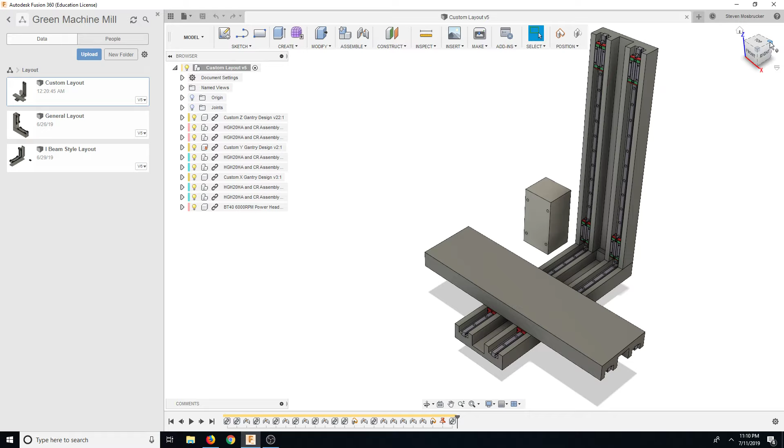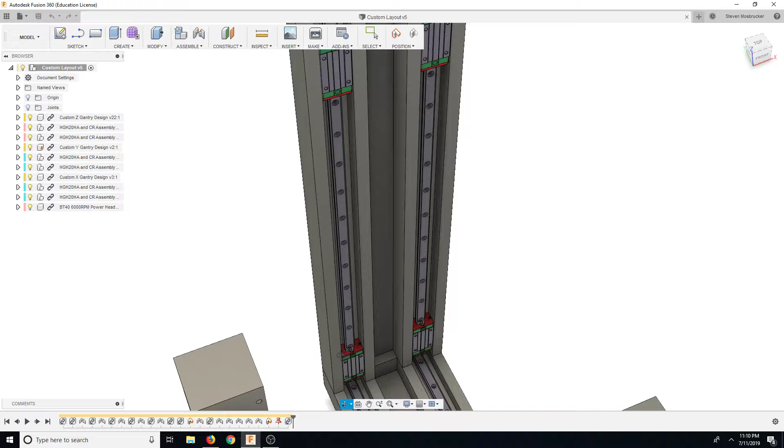Still need to contact these guys about getting the 3D model for this guy, so I could better represent it. But overall, we are looking pretty good. Again, we're at about 400 pounds. That's a weird artifact. And everything is fitting together rather nicely. Obviously, some of the stuff needs to be opened up, but that is okay.

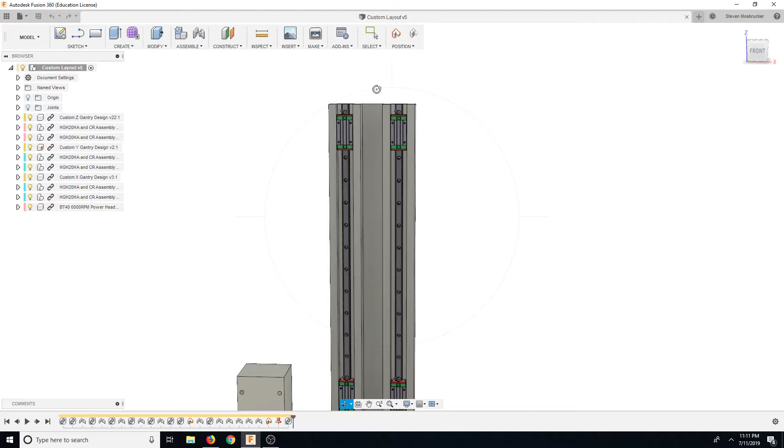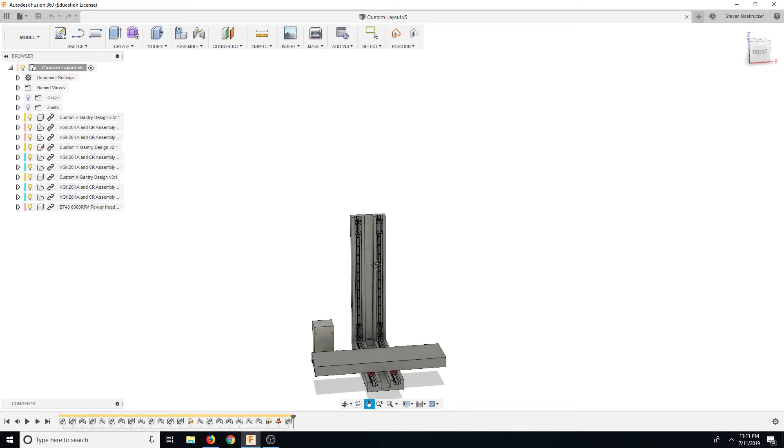So another thing is that up here, we're going to have a motor mount that allows us to stick our motor there and have a coupling. It'll probably be raised a little bit up and bolted down, and then we'll have our coupling going inside of this block to protect it, and it's probably going to be a flex coupling, and then it will block all the chips from getting up in there because it's inside the coupling. Same deal here and here. Obviously here it's going to be sticking out.

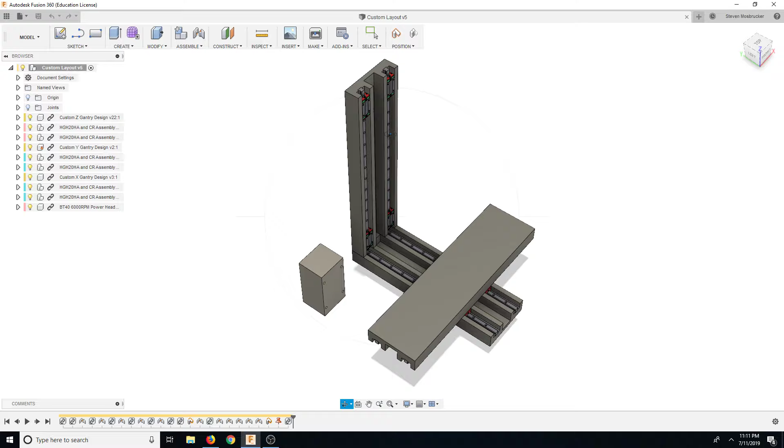What I want to do on this one, because I have less clearance here and I don't want anybody to bump into it, I'm probably going to put some feet on the bottom, and the motor will actually be down here, and then it will be pulleyed. I'm thinking something similar here, but I don't really have the room. So I might even put the motor over here on this side, because this is going to press against the back wall, and I want it to be pulleyed. Same deal with this one,

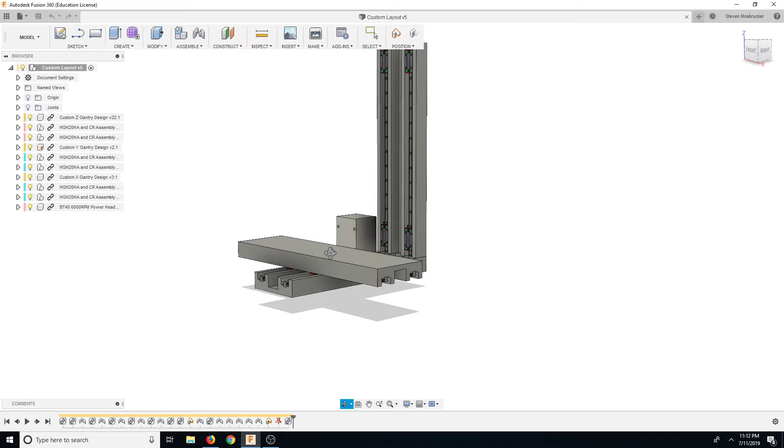but obviously here I do not have the clearance, because originally I was going to have the motor sitting down here and have it go underneath, but then I'm going to lose a lot of clearance, and the higher up this guy is, the more of a moment we're going to get for this rotation here. So I might put the motor back over here somewhere. And again, this is how tall? This is 2.5 inches tall. So let's see here.

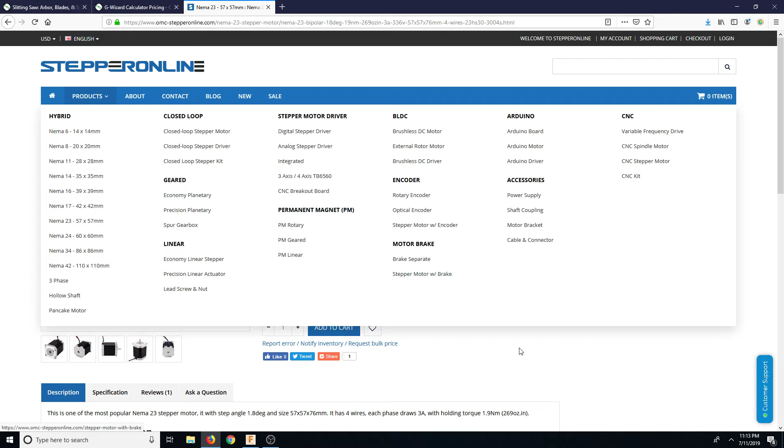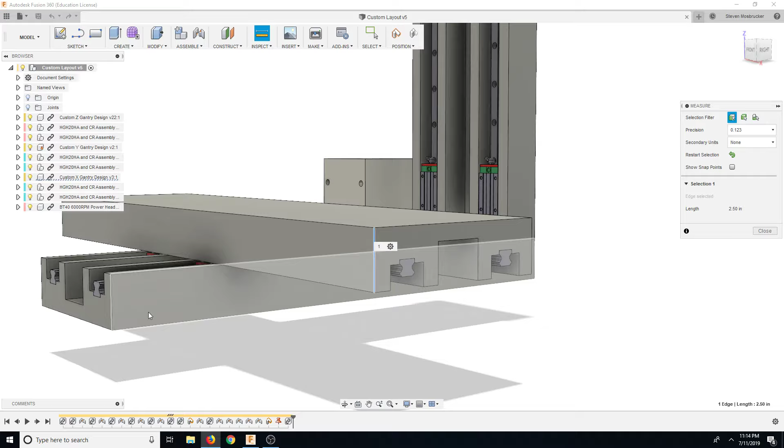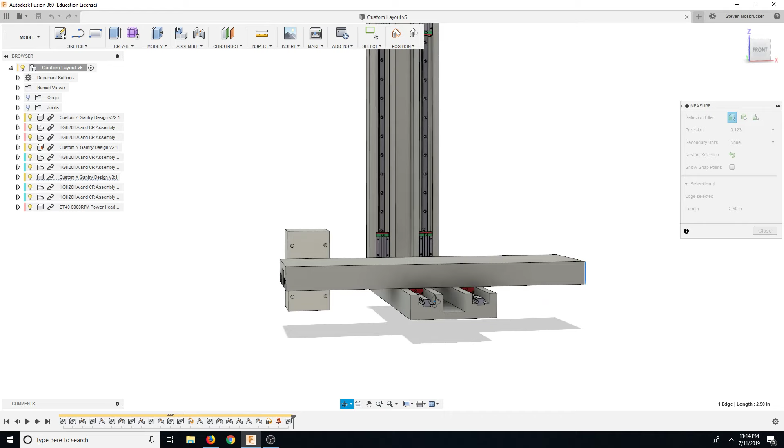2.25, so that'll just fit on the side here and not worry about any sort of clearance. But obviously what that means is that we're gonna hit here. So how are we gonna do that? Obviously you can't fit down here because it's gonna hit, and it's going to hit over here, and we're going to lose here. Put it on top, but then this top piece is going to have to be 2.5 inches tall.

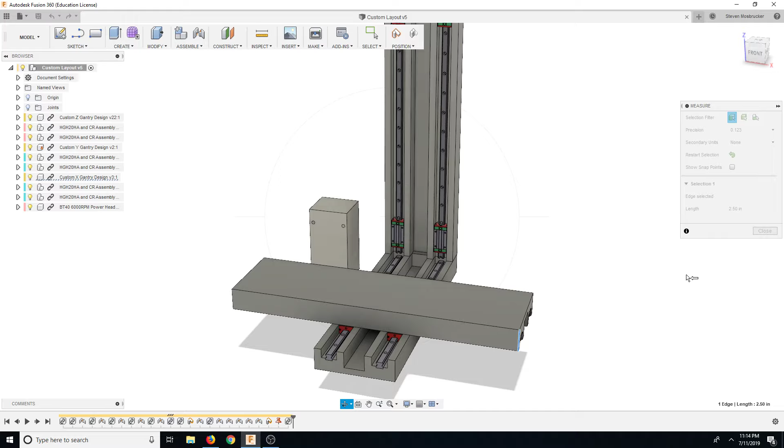But one of the things is we can put it up here on the front. It's going to stick out an additional 2.3 inches, which is not very far. And we're not going to have any issues with clearance. And it's not going to hit here because it's on this side. The front is really what I'm not too worried about. And then same deal here, put the motor down here. And then we should get the best of that.

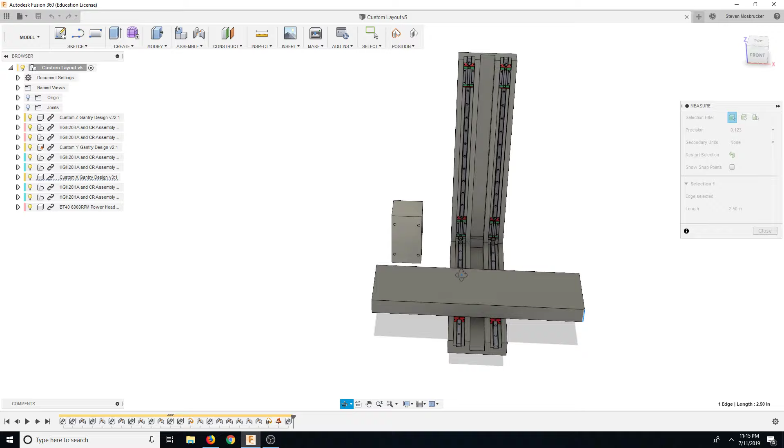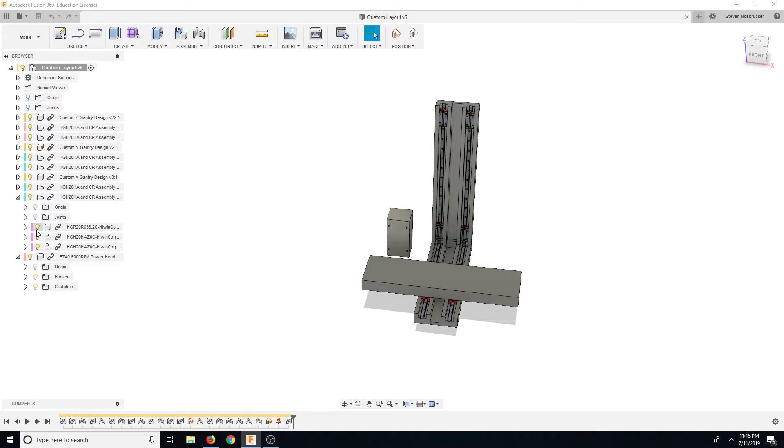I mean, there's not really any other place. Obviously that's extremely strange to put it there, and then we'll have to put something on top of it. But other than that, I think that'll work. Okay, so now, again with the math. I remember our math was wrong here before. So let's go ahead and fix that. Yeah, and we could see them in there.

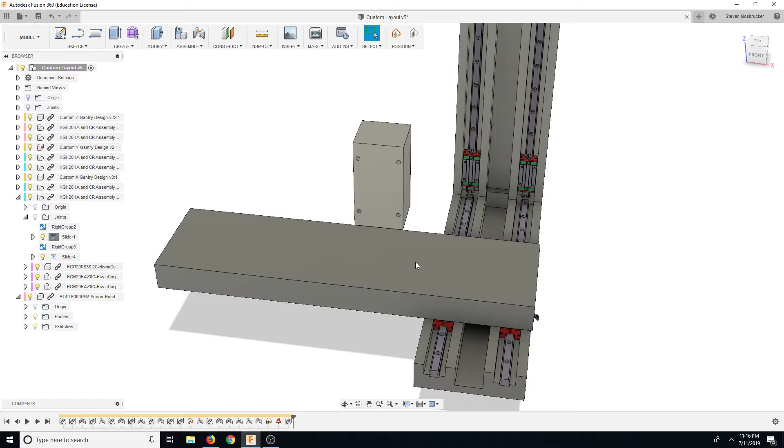Oh, and then I have my little notebook. That's why I wrote it down. So this is negative 22.75. You see the little nub there. Obviously, there's going to be another nub there. So if you want to do this, you move it all the way back, and then you could get the thing underneath it there. And then these are stationary, so they're always going to be going back and forth with this. Is that almost flush? Oh no, it's sticking.

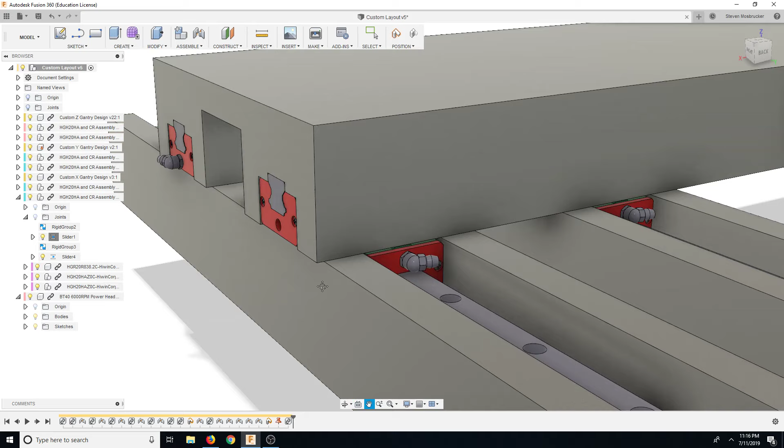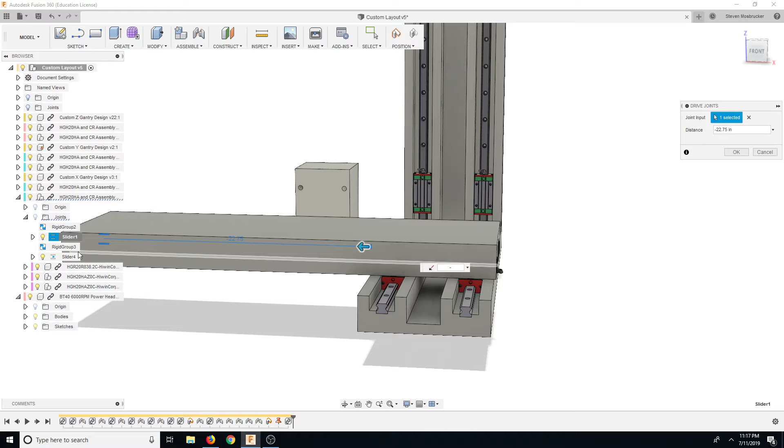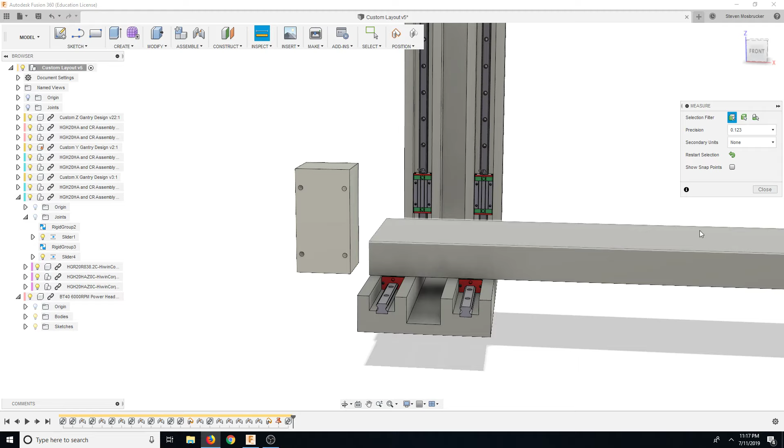Sticking over just barely. So we're losing a little bit there, but we could probably get this guy to come off a little bit more to where this is flush. But anyways, let's go the other way. Drive joint. So let's say that this is... oh no, positive 1. Why did I write negative 2 there? Plus 1. Okay, so now, again, let's open up the Trello here. So now if we go from here to here, we're talking 23.896.

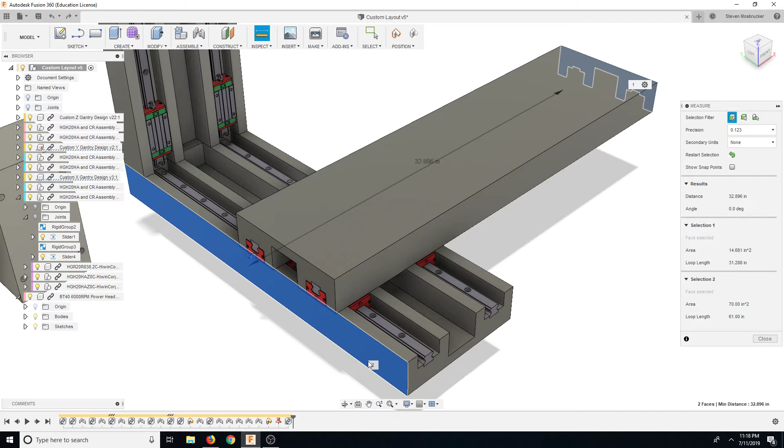Wait, where did I do that from? I just have to stay consistent on where I do it off of. Oops. .24 inches. So this is 23.

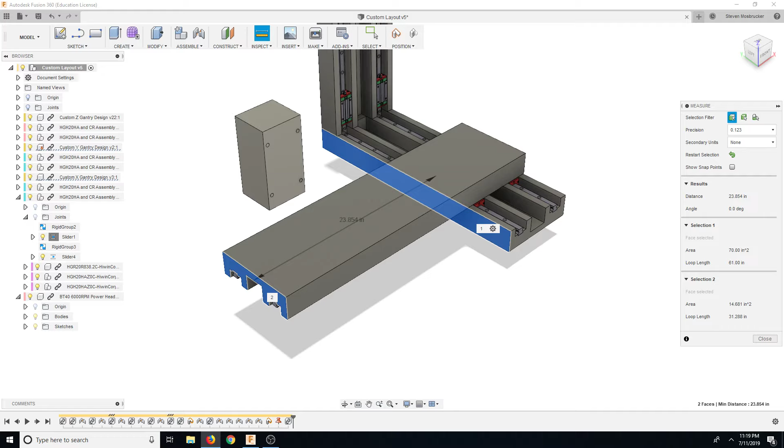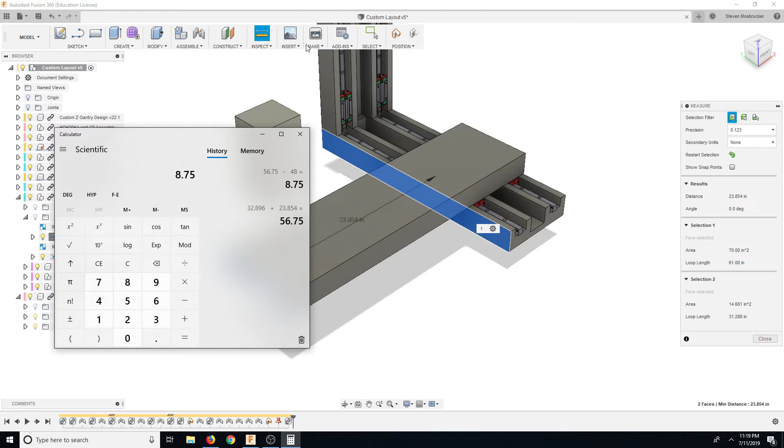So total is 32.896 plus 23.854. That's 56 inches. Total that we have is supposed to be 48. So let's cut off 8.75 inches.

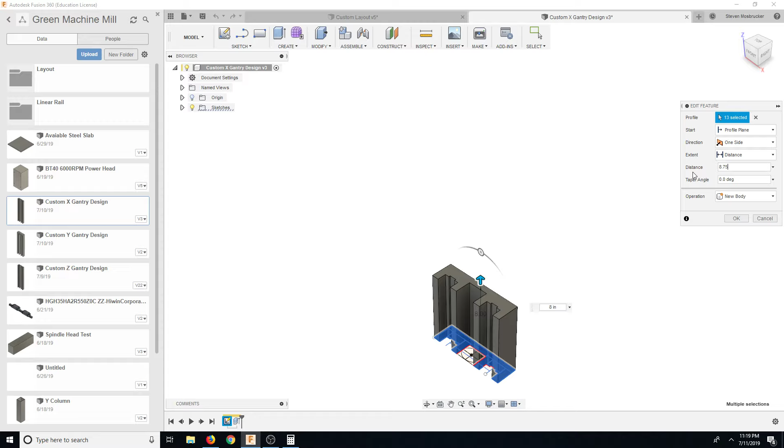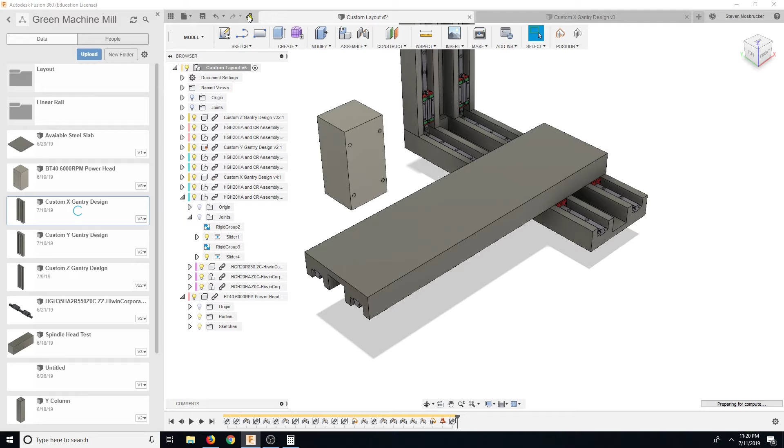Oops. So basically what it looks like is that we're getting rid of the center portion. So now it's going to stick out quite a bit, and we're losing 9 inches there. Okay, so custom X gantry, bodies, oops.

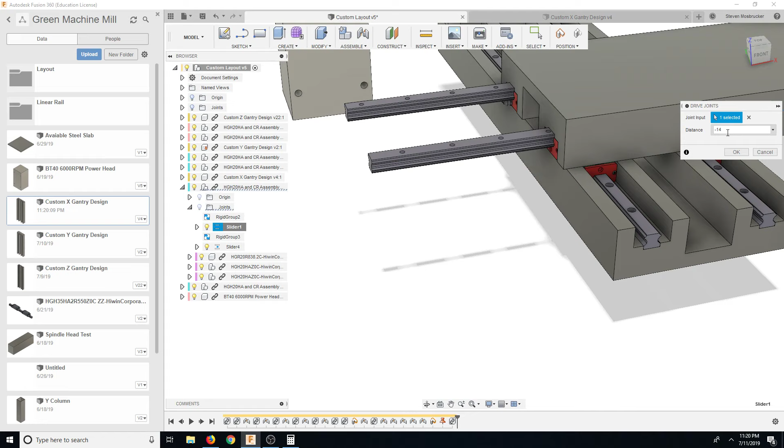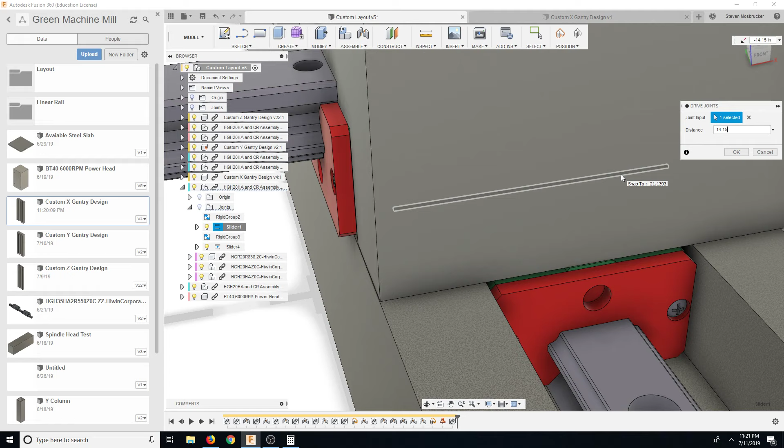Okay, so the new one is +1. Let's say like -11. Okay. So say new one's -14.15. So that's 15.15 inches, right, for travel total. Okay, so now let's see if we could clear that.

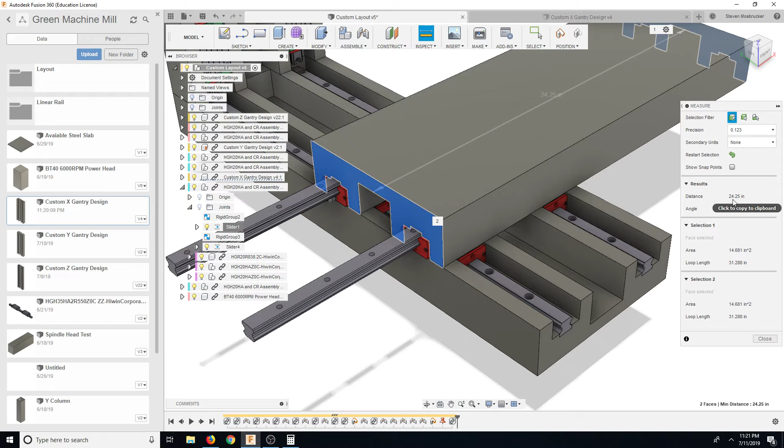This distance is 24 inches. No, 24.25. And that's at that distance. And let's drive it to +1. And this is 15. Looks like we are short.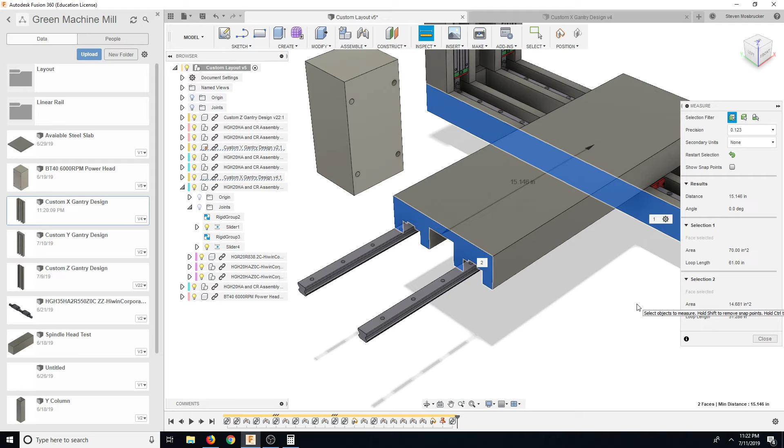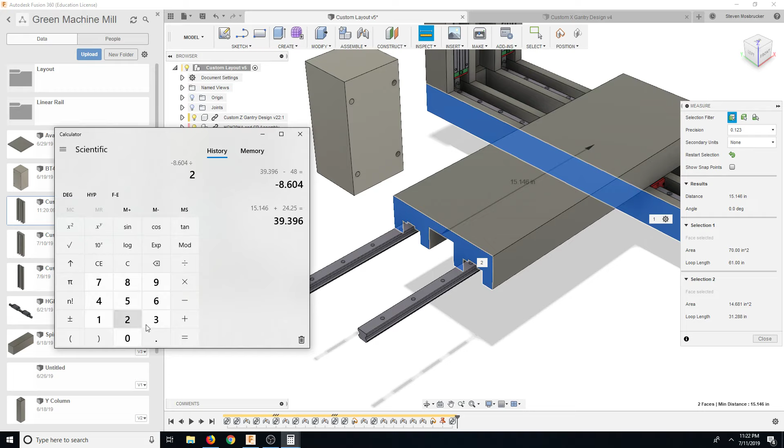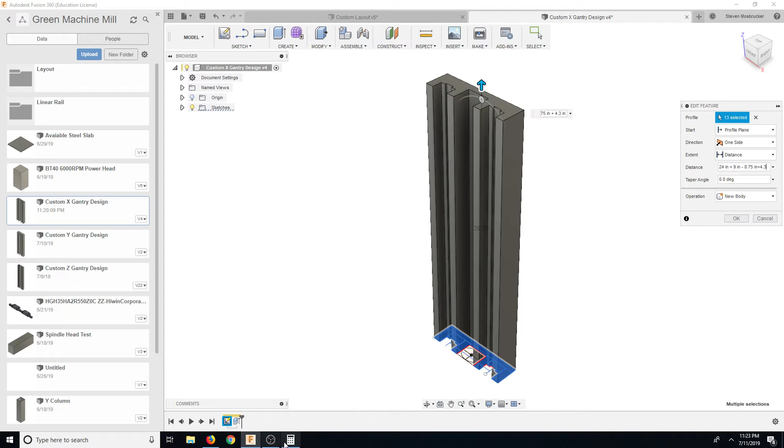And then this divided by 2 equals 4.3. So now if we go back and we change this to add 4.3, because we're moving it twice, plus 4.3 something. 4.302. Okay, so now let's go ahead and save this. Let's go ahead and update this. So now we should actually get almost exactly what Tormach's got.

So now we're going to keep the same 1, and we're going to delete this again. And let's go ahead and drive the slider, and then let's go negative. The last one was -14. Let's say like -16, -18, -19, 18.5. That's okay. Probably 18.45. -18.45 to 1, so now we have 19.45. It's almost exactly like the Tormach.

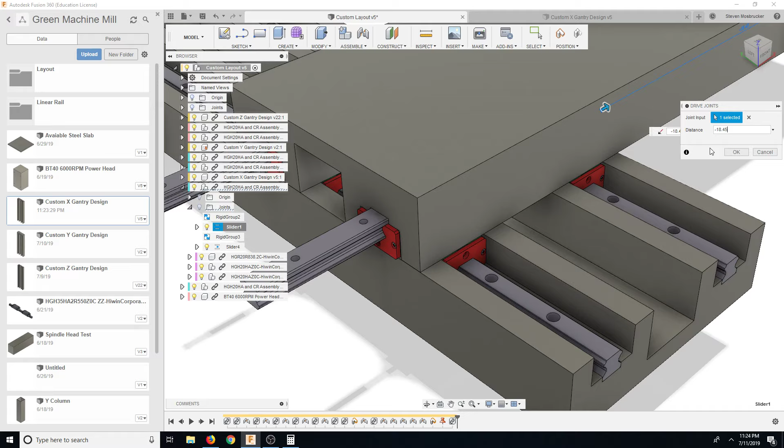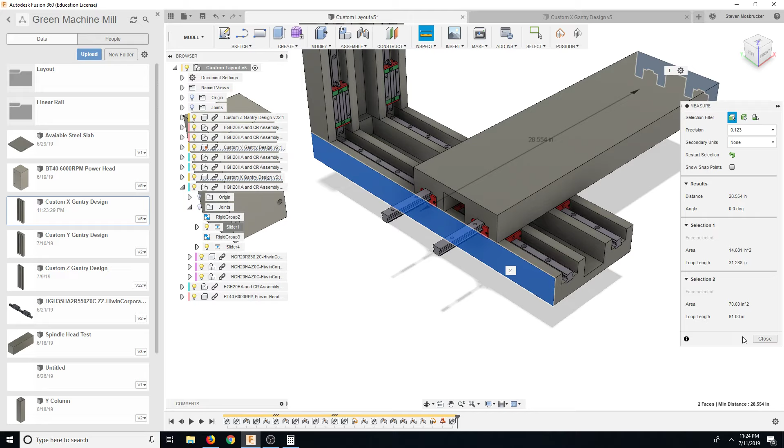Okay, so now let's look here. Basically what I'm going to do is go from here to here. It's 28.554. Let's drive the joint, and let's go to +1. That's 19.448. Now I can tell you we are really close. 28.554 plus 19.448. It's 48 and 2 thou.

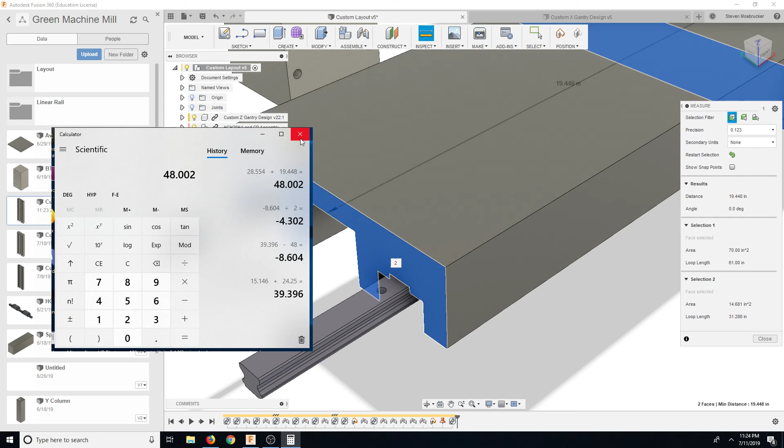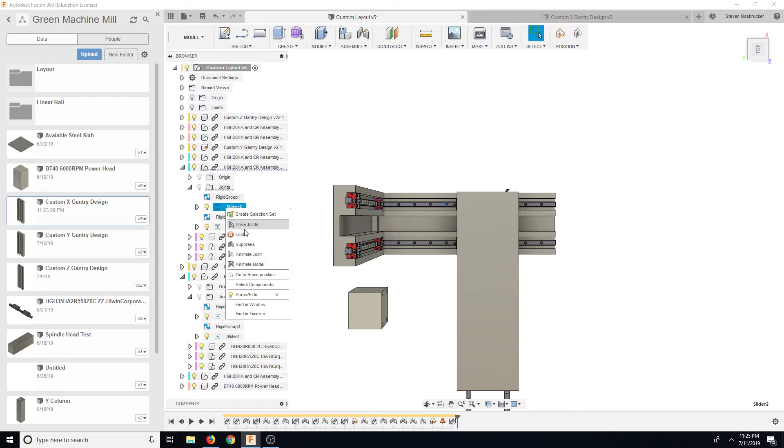Alright, so that is a total of 19.45 inches. 19.5 inches. That's another inch and a half over what the Tormach requires. And let's go ahead and see the total travel of the head here, of this other axis here. So let's go here and pick one of the joints. Drive joint. Let's see.

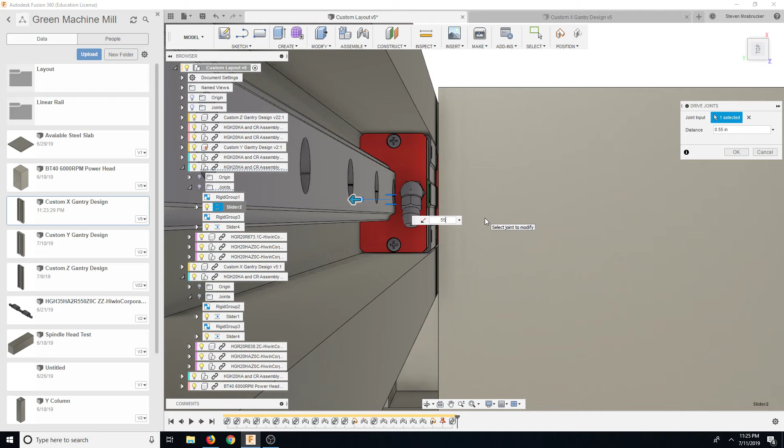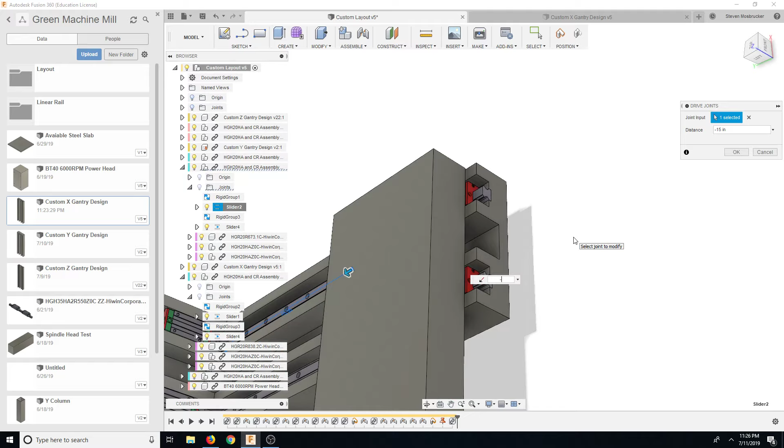Let's pretend that this is on the inside. Oops. 0.75. I mean, this is obviously to a big extent here. Okay, so now let's say here, so the y-axis is about from 0.6 to... and of course we could go over the table, but we don't want this to go past, which it looks like it's pretty much there. It's 0.6, negative 15.75. So total is about 16.35 inches. So 16.35 inches on the,

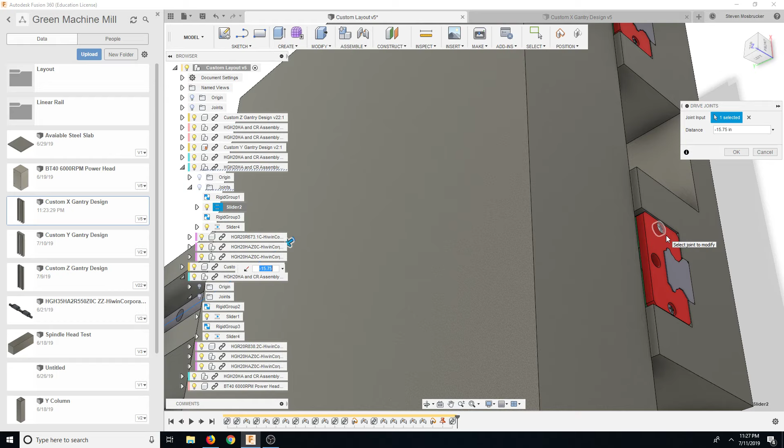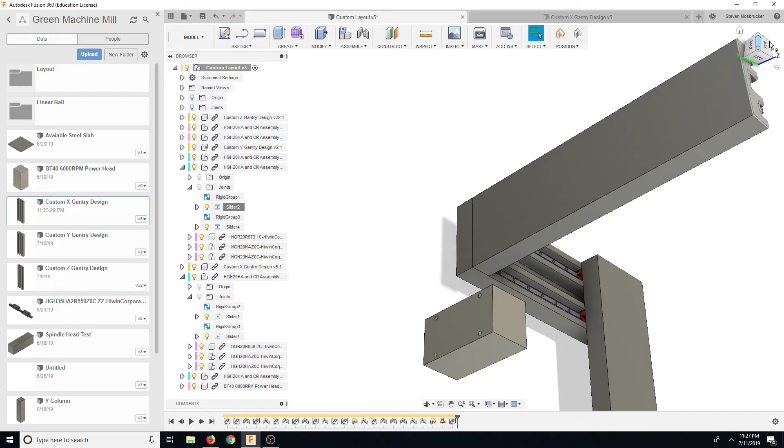so let's look at total travel. And obviously we're losing some here because they're basically two combined. So this should be 28 inches, right? This should be 29 inches from here to here. Oh, it's 28. So this is actually supposed to be longer. But we have the pulley there for clearance, so 28, 29, whatever. We could probably add another ½ inch and have a pulley stick out ½ inch, but that sticks here and we save with the motor.

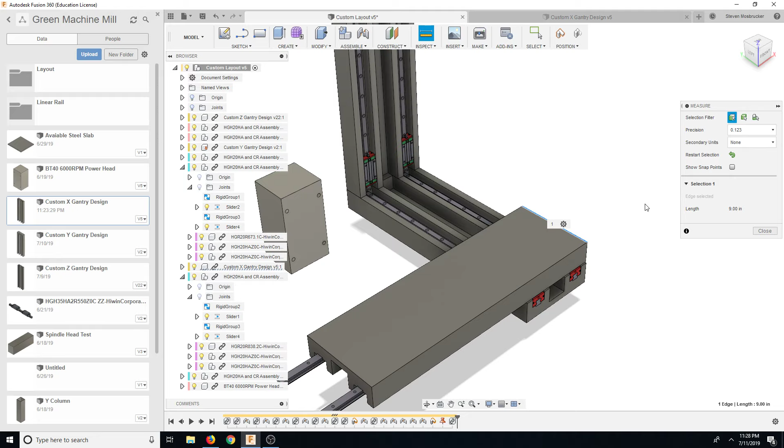But anyways, total travel in X is 19.45, and Y is 16.35. Now that's the total travel, but in this case our bed is only 9 inches, right? It should be 14 inches. So what that means is that we're going to lose a lot of travel, right? So here the travel's not balanced. So let's see here, custom X gantry. So this is actually supposed to be larger. Let's see if this breaks everything, which it does.

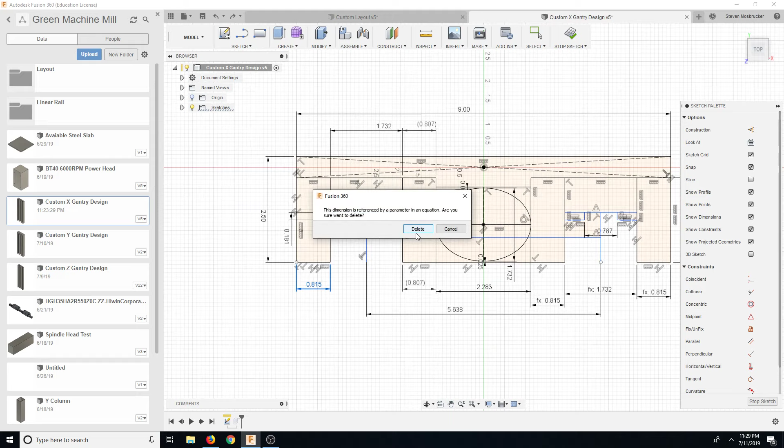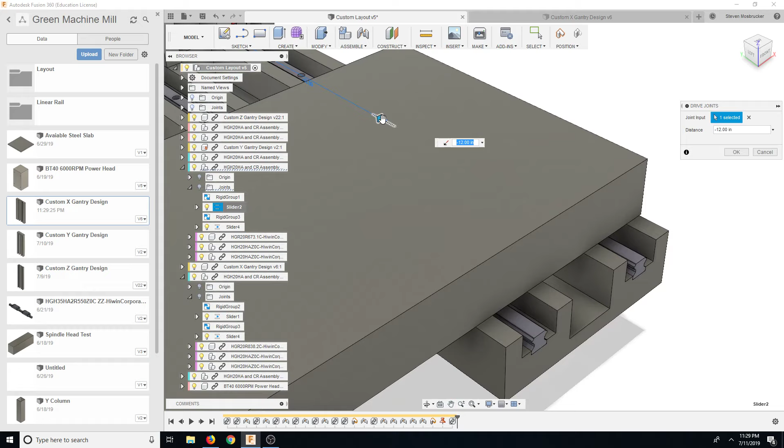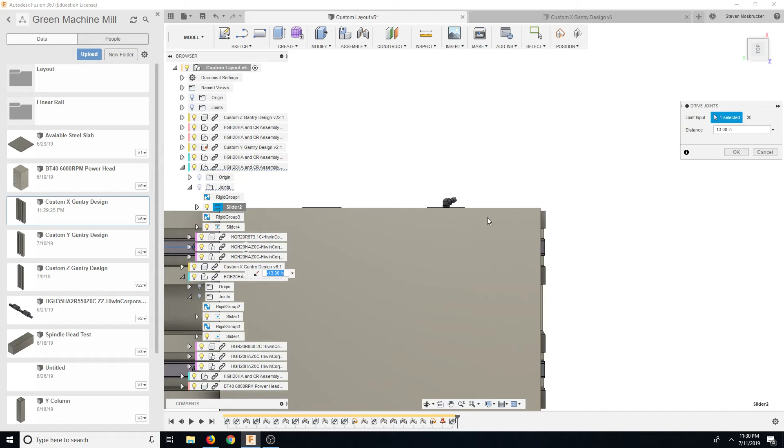I mean, that's basically it. Obviously, we'd have these separated, but you get the idea. Let's see if it breaks everything. Nope. Okay, so let's go back here. Obviously, this is incorrect, so slider here, drive joint. So this is going to be super unstable. Because that means that our part can only be 9 inches, which is not quite what we would like it to be. Because we want our table to be just as big as what we could load onto it. We don't want it any bigger, we don't want it any smaller.

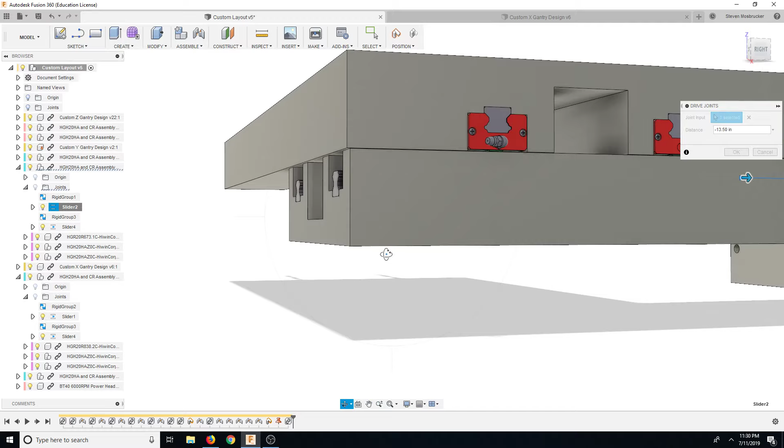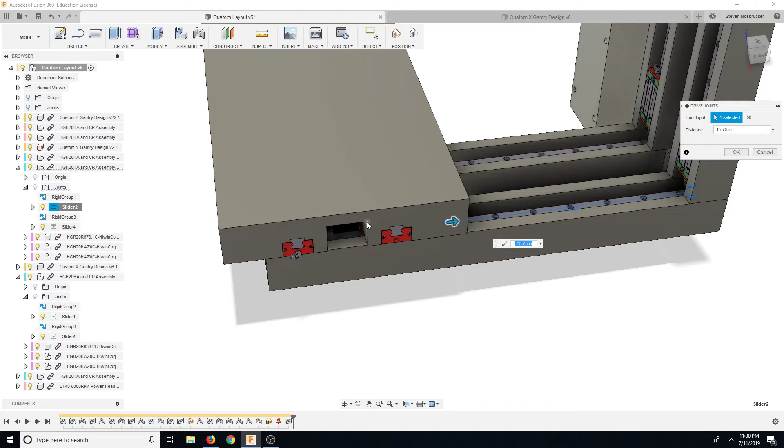Okay, so let's say that. So now we're at 13.50, because 16 was way too much. I should have known that, because that's almost square. That's not right. And then obviously, this is going to be so stable. But here's the issue: I have to make something that big.

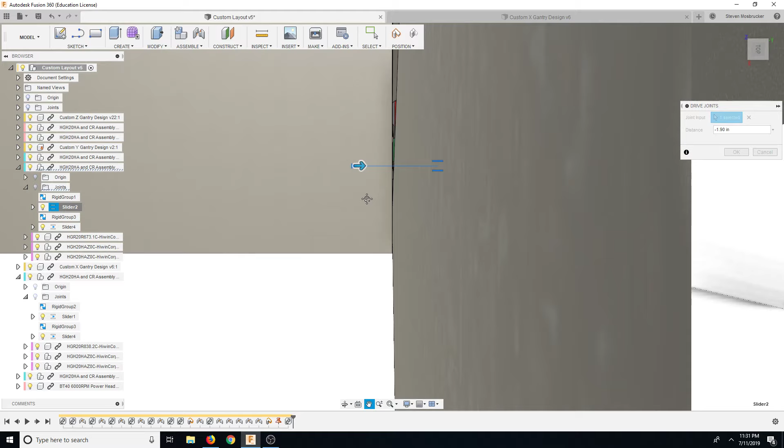I'll see that that's good. So 13.50 minus 1.90, so it's about 11.5, which it should be. Oh, and we're losing some here. Right, we're losing this distance here, so that's 2.5 inches. Well then again, this thing's only 28 inches, so 28 divided by 2 is 14, minus 2.5, which is 11.5 inches.

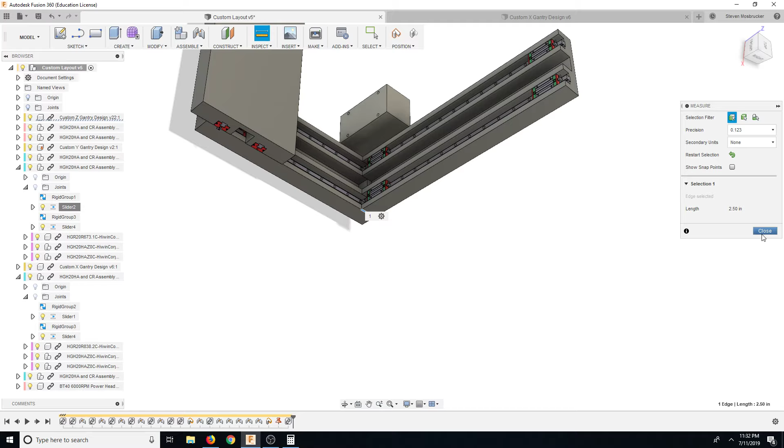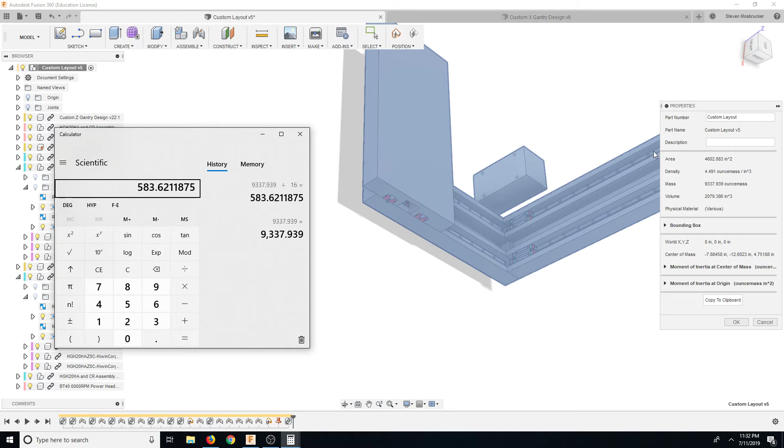Well, it's actually 12.5, losing 1 inch somewhere. Anyways, that's still 2 inches bigger than a Tormach 1100, so that's good. But now we're going to bump up this weight quite a bit. So now we're almost at 10,000 ounces. Oops. We're at almost 600 pounds now at this point.

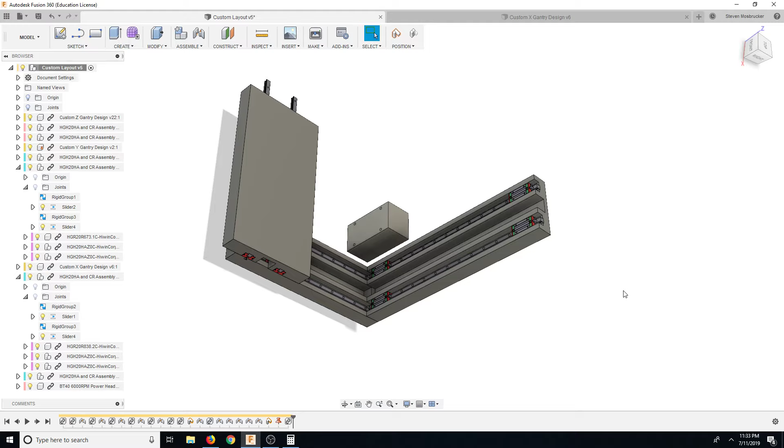Oh, and also, this is bigger than 9 inches, so it's not going to fit inside the vise. So we're going to have to stick it in the bottom. And then these we're going to have to send somewhere to be surface ground flat, which hopefully doesn't take that long. This one does. These ones don't. This is machined, that doesn't matter. This kind of matters. That kind of matters. These are basically going to be machined straight on the machine. This guy, because these have to be in line, otherwise stuff's going to be tweaked out.

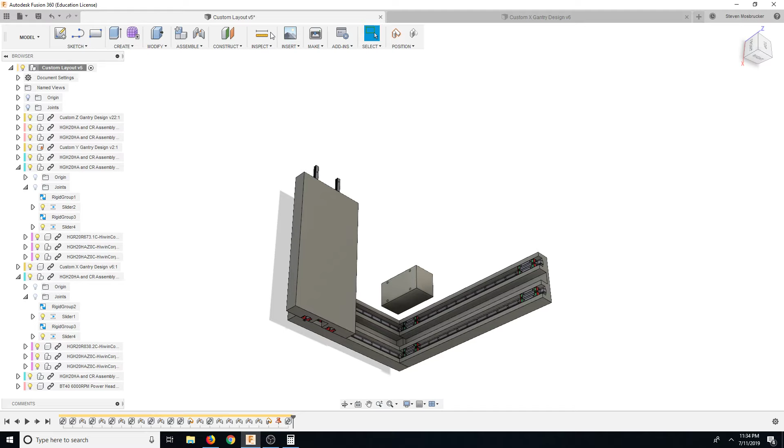But you can put this in the vise upside down, machine half of it, then flip it over and machine the other half. So this we might have to machine on a different machine instead of the Jet, because this is a big boy. Maybe my boss has something that'll open up 14 inches. It's a vise, so you can't do the inside. Maybe we could do a fixture plate where we glue it down or use some sort of industrial tape, and we square it up, and this also doesn't matter.

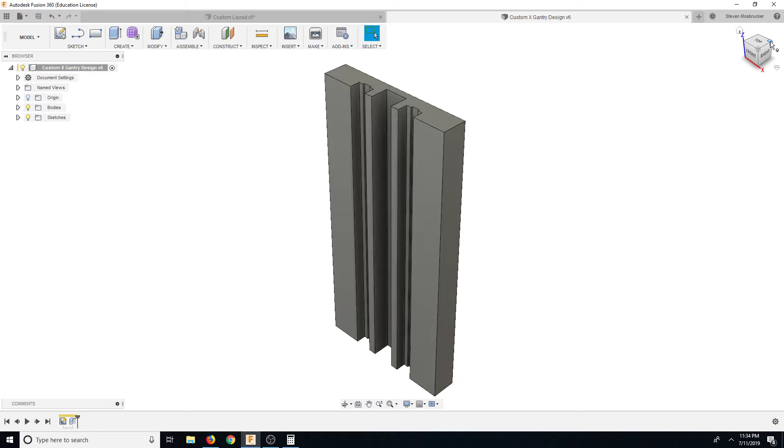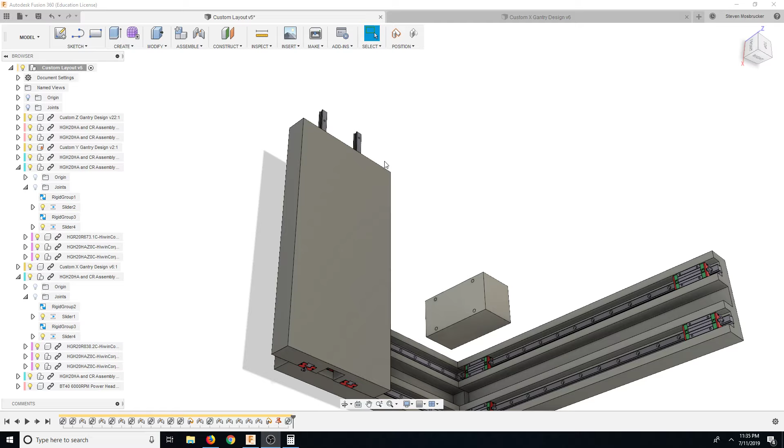It's just these machined parts, and now this is going to have to be machined. Oh, but we're just going to machine it on the machine, with a big shell mill so that it reaches all the way to the edge, and then use a, what's it called, not a file, not a grinding block, a grinding stone. Just stone it, knock over all the edges, and there you go. Then we could put some holes in it and put a fixture plate on top. So this is going to be decked with respect to the machine so that everything is square at all locations.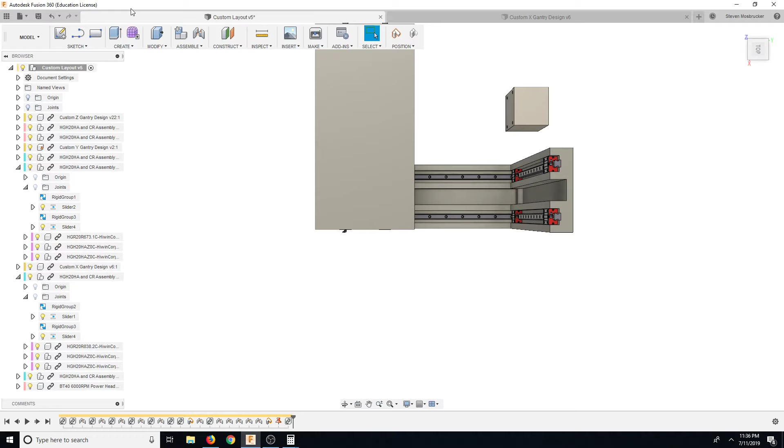Alright, now that we have that, I'm going to need to go get some shorter ones, but we've seen that on footage already. We're going to drop this size. Now we need to stilt this out, that distance here, which is 28 divided by 2, which is 14, minus 2.5, 11 and a half inches. Or in this case, the middle of the travel, which is 11.5. Is it basically 11.5? No, it's got to stick out half of that, so about 5.75 inches.

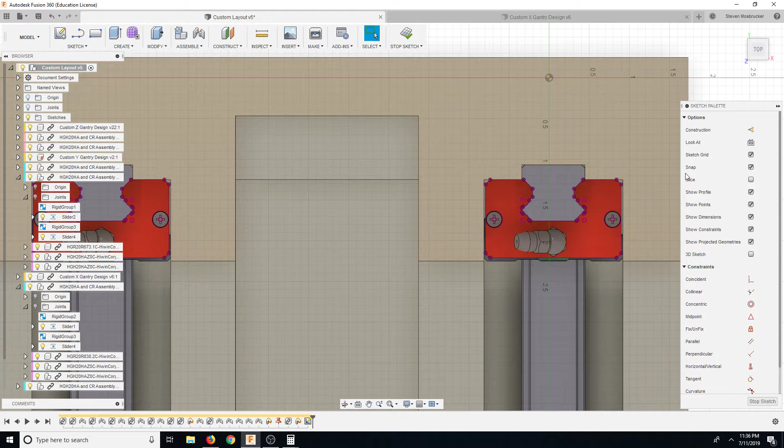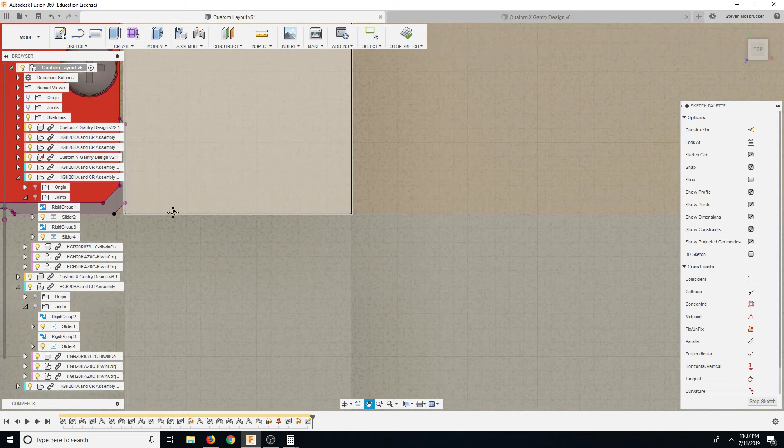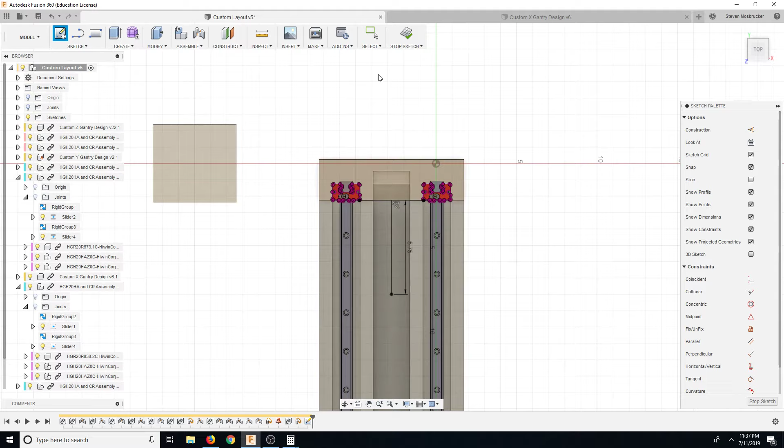Let's go up here and capture a component. Oops, that's the seal. We want this, the mounting block. See how it's nice and flush there? Yeah, let's not do that. Okay, so now this guy's got to stick out 5 3/4 inches, 5.75. So how much additional do we have to stick it out? I think we'll have just enough room for the motor. This is already 2, so that's the center. It has to stick out to the center.

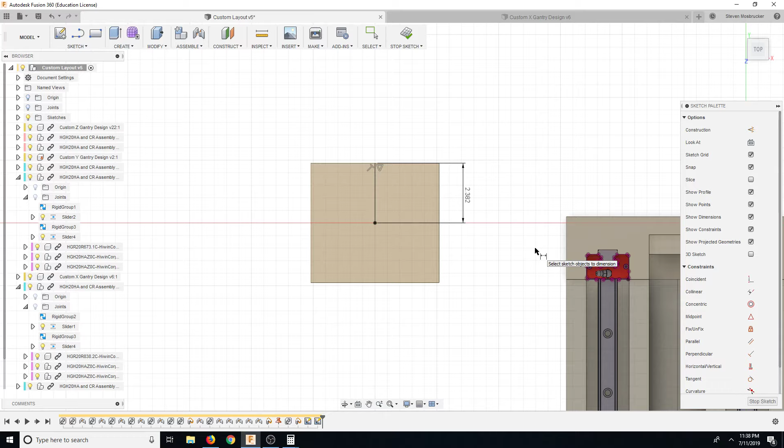So we need 5.75 minus 2.382, which equals 3.368. So we need even more than this, but this thing is 4.75, so if it was that whole thing it would be really close. Plus the bracket thickness, say the bracket was 3/8 thick. Then that's only 40-something thousandths, 3.40. It'd probably be that 68 thick just to shim it.

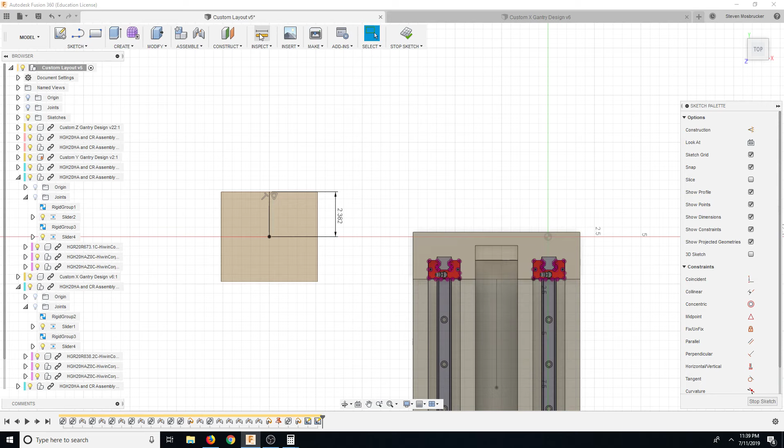And then we have the motor that fits in there, which has to be about 3 inches. Where are my calipers? So the motor is going to have to be about 3 inches. That's a big motor, almost as big as this guy. And then a motor sticking up that clamps onto this guy. So what if we bought one of these spindles? Oops. I had that guy talk to me. Let me see.

Oh, he said 65. It was a 65 millimeter. Ooh, so that's 2.6. And that was a 2 horsepower. Do we have a bigger one? That's the other thing. Obviously, that piece needs to be shorter than this, all the way down to the electrical, because we don't want to cut anything or ram it into anything.

So let's look at the power head. Oh man, so beautiful. Look at these. $79. Oh man. I mean, it's probably not balanced to super high RPM, but we only have 6,000 RPM to work with anyways. So, or it could even be kind of like Garbo ones, like these ones. I mean, they're not garbage, but they're not the best quality. But I like how far they stick out. They don't stick out very far.

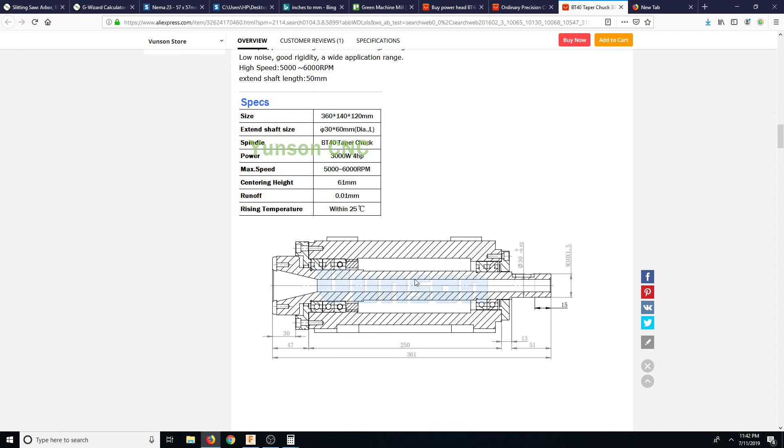And then this would be a high quality thing to use with a BT40 collet. And obviously the run out on that is not a big issue, and the bearings on that spindle will last a really, really long time. And because it has low run out and it's low load, it'll keep these running a really, really long time. So these shafts up here, compared to down here, so I think that's really a good option. Or we could use that brushed spindle that's in some sort of old Craftsman lawnmower.

Yeah, so this looks really, really good. I am excited. So that spindle, where'd it go? With that spindle, I'll probably add another. Oh, this is a 1 horsepower though. Let's see if they have a 3 horsepower. The ATC spindle, $1,700. 3 horsepower, $200, and then we need a VFD, which looks like another $105, that we need to put underneath the machine, because we don't really have any other space up over here.

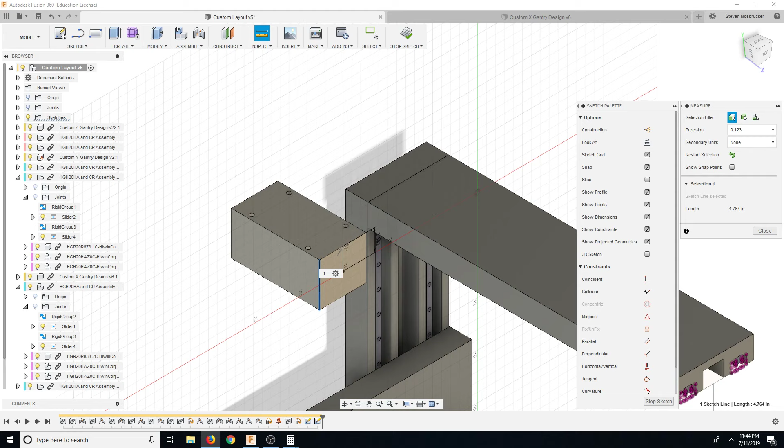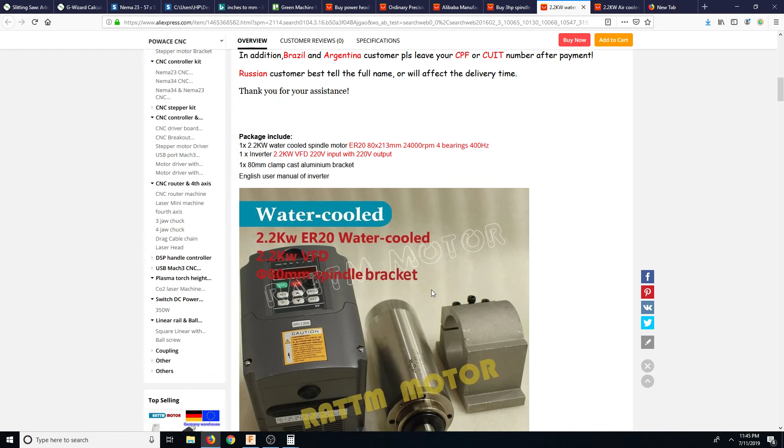Here's about $320 for the set, or $375. Oh, wow, it's way cheaper to ship it from in the United States. Unless maybe I dropped this. Nope. Nice VFD, 3 horsepower. So that's another option, but we're definitely below the $1,000 range. So what about the 4 horsepower? But again, this is probably rated at that much. So let's do this one last check. So this is rated at 3 horsepower, right? There we go, that's better. Well, it's still about the same as the United States.

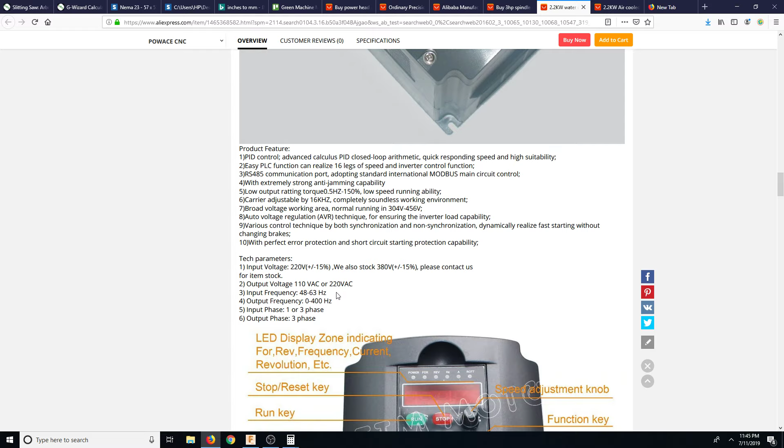And this current, ooh, we need 220. I doubt I'll be able to find something 110. Input phase, 1 or 3 phase. Oh, output voltage. I mean, I do have it in that garage, but we're at 36 minutes. So I don't know what this accuracy means, but anyways, yeah, so let's see if we have 4 horsepower.